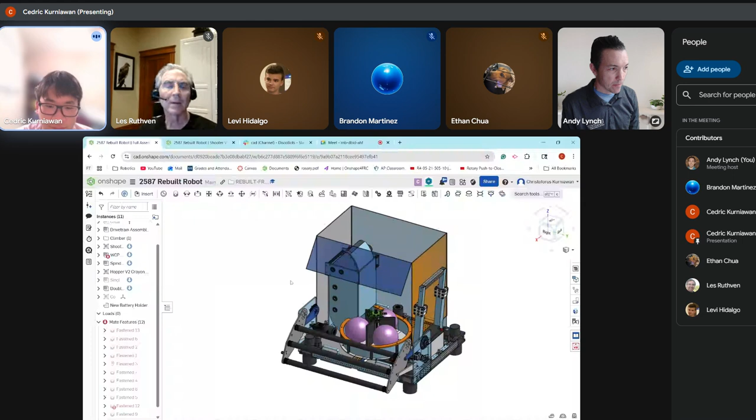All right, so we made pretty decent progress. CAD-wise, there's still just a billion details that need to get put in, and we're slowly working towards that. We did a lot of really good testing on Saturday, especially with the Spindexer.

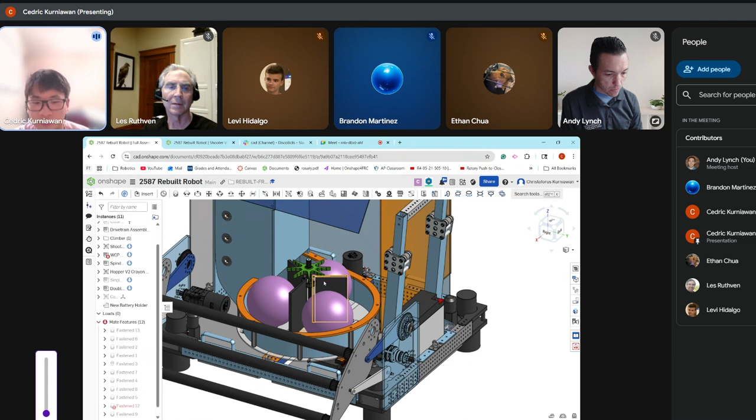We actually found that with the way we have it set up here with a short wall, the brushes are quite problematic. So we tried kind of a stacking, like a cake, using 4-inch wheels, then a 3-inch wheel, and a green compliance star on top. We found that worked incredibly well. It was really violent, which is exactly what we want.

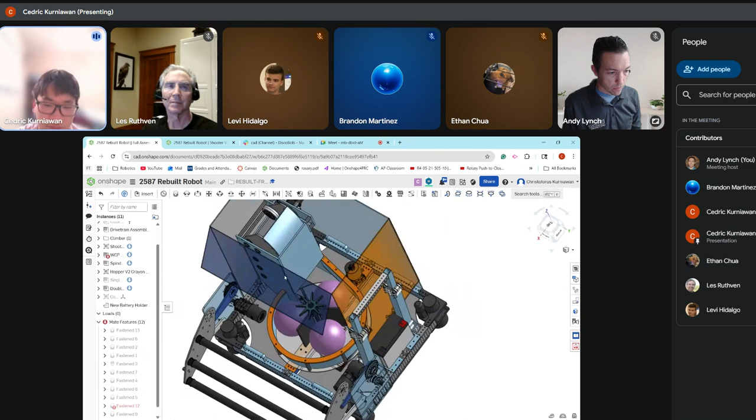So I'll hopefully make that change in CAD soon, adding in the wheels, because I think we're pretty happy with how that went. The Spindexer isn't final, but it's probably the most developed thing we have on our robot right now. So yeah, we're pretty happy with that.

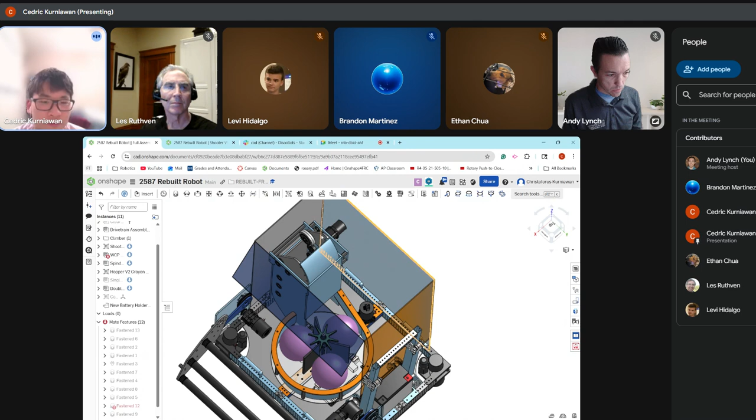We also tested the shooter. The shooter was a bit tougher to generally test just because there's a lot more that goes into it. It's not a subsystem that can really easily be tested. But we put it onto a CIM motor, and we found that we didn't shoot very well. I think we shot maybe 6 feet or so, kind of just across the room a little bit. So the shooter's going to get a bit of a rework.

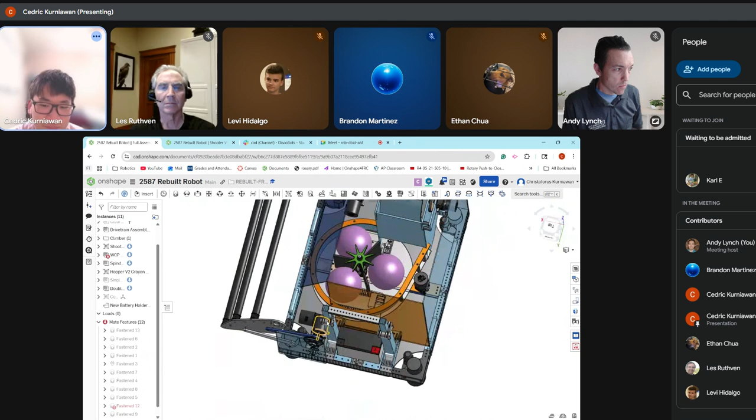I think the big thing I really need to work on, which is lacking a bunch of detail right now, is the hopper. I realize it's not actually as straightforward as I initially thought, just because especially on the side where we have the intake and over the climb, there's not that much space. It's hard to find the balance between creating good support for each of the hopper panels while still maximizing our fuel storage. So I'm still slowly working towards a more detailed funnel.

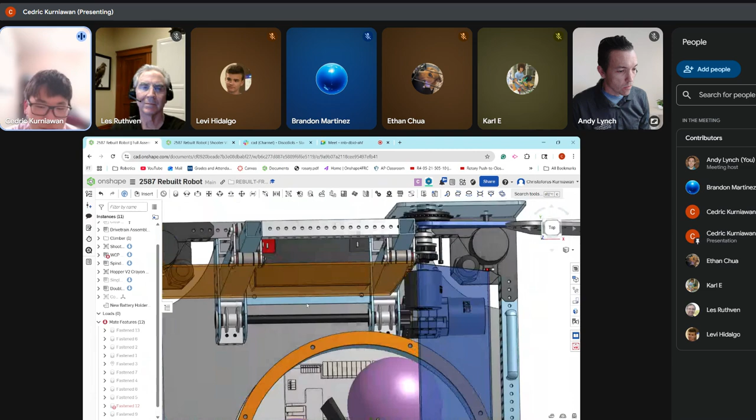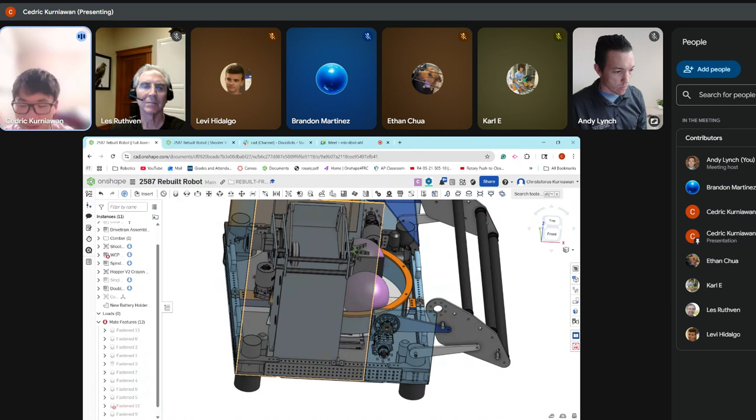We cut out temporary panels from black ABS sheets, just to have something to represent a hopper, so we can hopefully eventually get to a point where we have an intake, a spindexer, and a shooter, so even if it's just a couple balls, we can intake some, spindex, and shoot them.

The hopper is just something I think I'll really have to look at closely. We made a temporary corner piece at Lamar the other day. There's a tube plug at the bottom, so you can just bolt it straight into the belly pan, and it'll work as a temporary cover for now. Eventually we want a very well thought out, clean slope, but right now it's a minor detail.

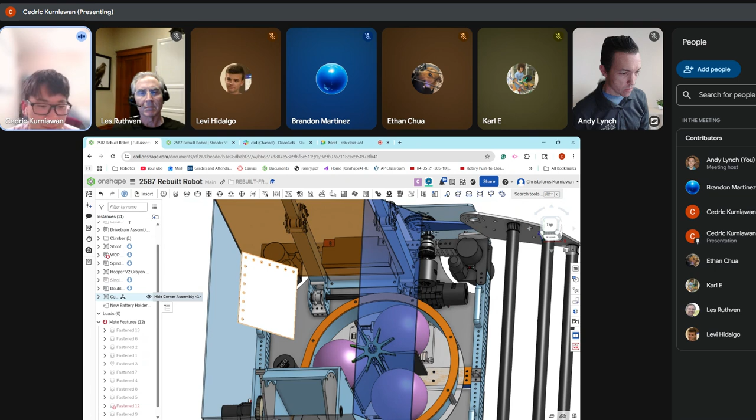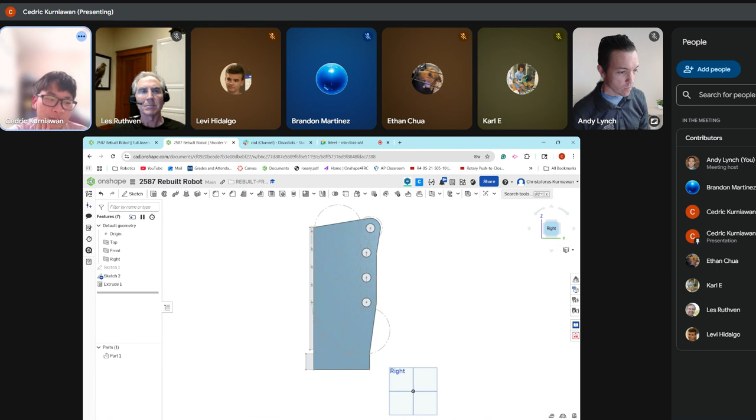The biggest thing I've personally been spending the most time on is the shooter. I realized last night that copying the WCP shooter may not be the best idea because they use different motors, and I only found out a day or two ago that they had 4-inch wheels, not the standard 3-inch Colsons I thought. That's a big deal because the bigger wheel lets them get more surface speed, and it worked well with their compression.

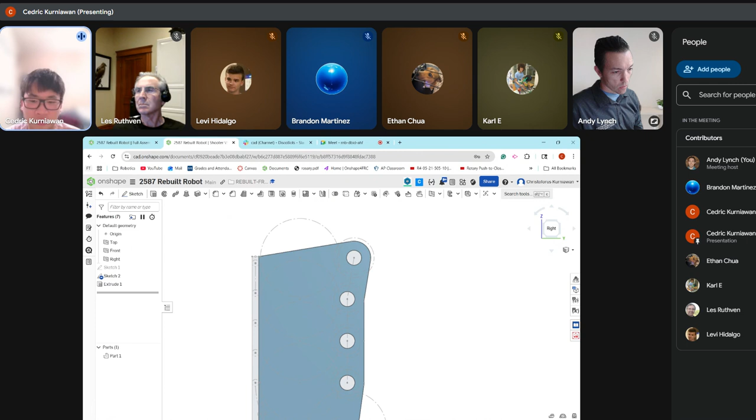But we don't really have 4-inch wheels, we have a lot of 3-inch wheels that I think we can make good use of. So I saw Rev posted a YouTube short showing them shooting a stream of fuel and getting every single one into the hub easily and consistently. I think they use a vortex and some 3-inch wheels.

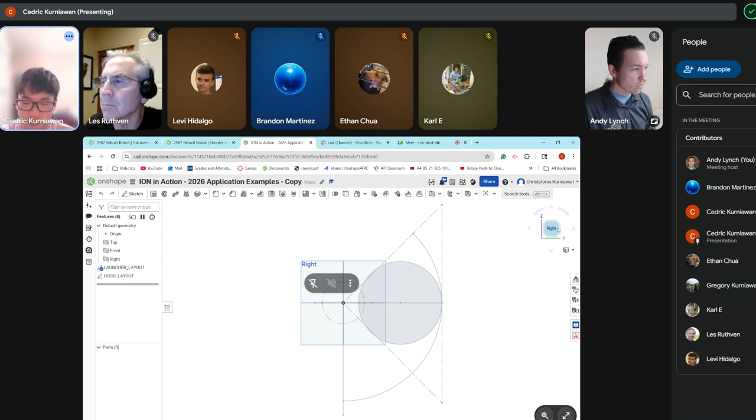I'm going to look closer at that idea because I think it's much more in line with the resources we have and the stuff we're going to pull. They have much less compression compared to WCP, so I think it's going to work a lot better.

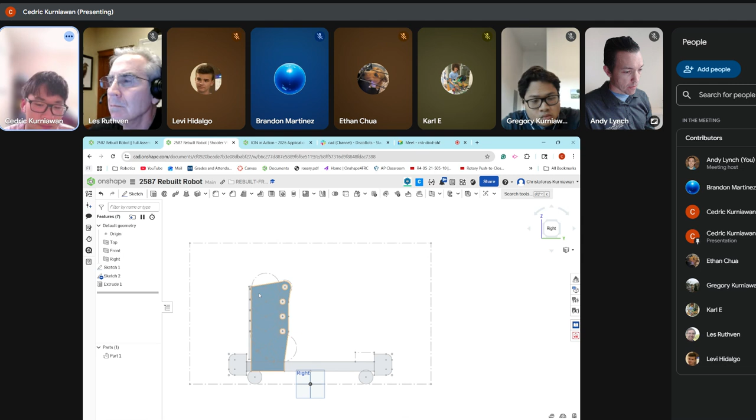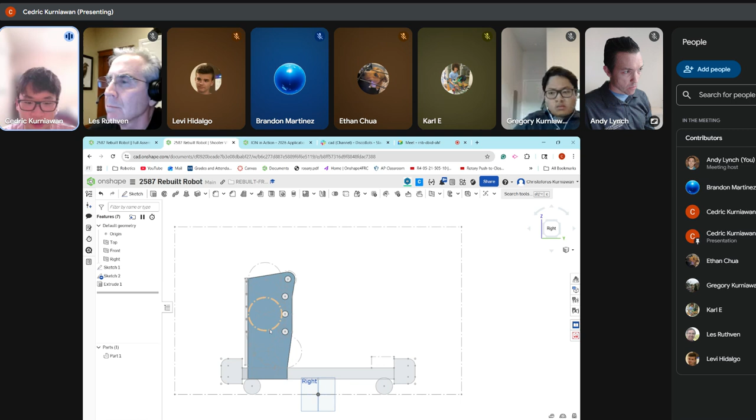This is my current iteration right now. We discussed finding that balance between a tall versus a shorter shooter, and we haven't really reached a final decision. But a big thing we pointed out is if we wanted to shoot over a climber, which we plan to do, we have to shoot over our whole hopper. So our shooter naturally has to be relatively tall, since it has to shoot over our whole robot's height of about 30 inches.

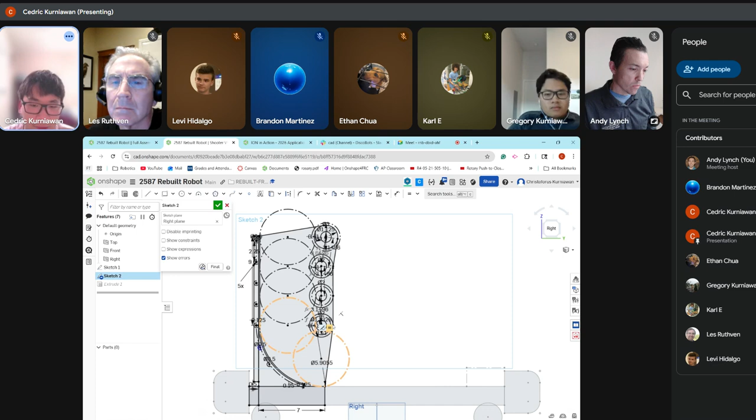What I have right now is I laid out the sketch and tried to make sense of everything. We have a ball here, and the idea is we make this sort of like what we did with our spindexer, where we have polycarb zip tied to churros. I was thinking as the backing of the ball path we can do something similar, since I've seen other teams do it too, using that backing to create the slope and a really smooth ball path for the balls to travel on. I tried my best to make sure there weren't any dead spots.

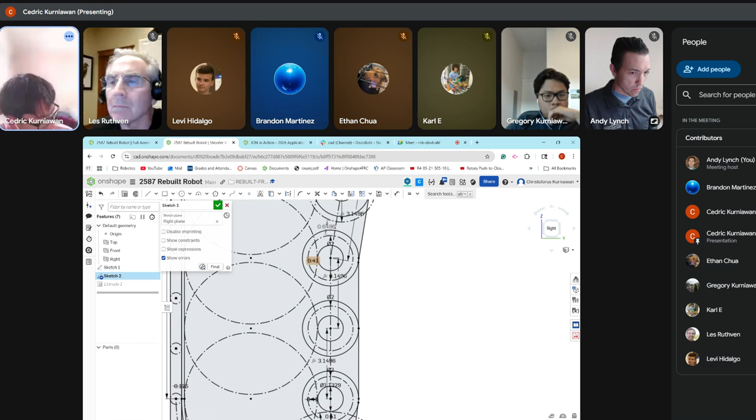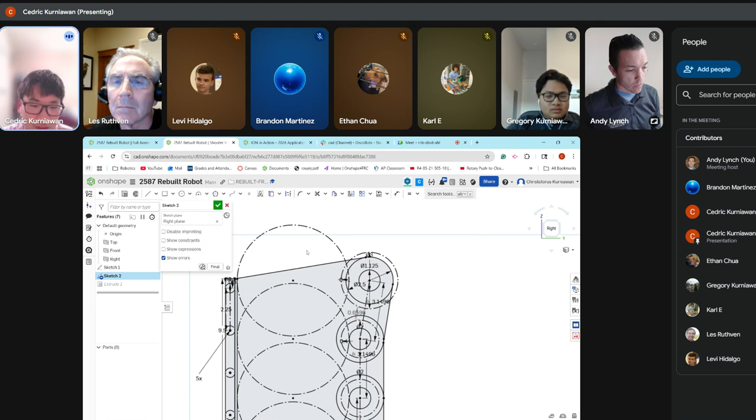For these compression numbers specifically, I tried to focus more on Rev stuff. Depending on how we want to do it, I think on the indexer itself a lower compression may work better, just so we can move the ball faster. The shooter compression I'm going to try to keep as close to Rev as possible—that's non-negotiable in my opinion, because they proved their shooter works really well. I think they use the 3-inch Rev grip wheels, so we have plenty of those from Crescendo, and we have a bunch of 3-inch Colsons with pretty similar properties.

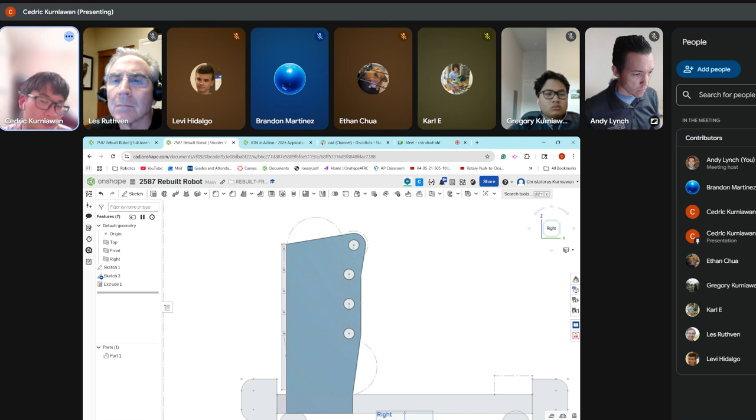Yeah, this is what I've been working on. I think the biggest challenge is going to be getting a hood working. My plan with the hood is to have it rest on the top of the shooter plate itself, and then I'll need to pick between an actuation point that comes from pulling it from this bearing hole, acting as a dead axle.

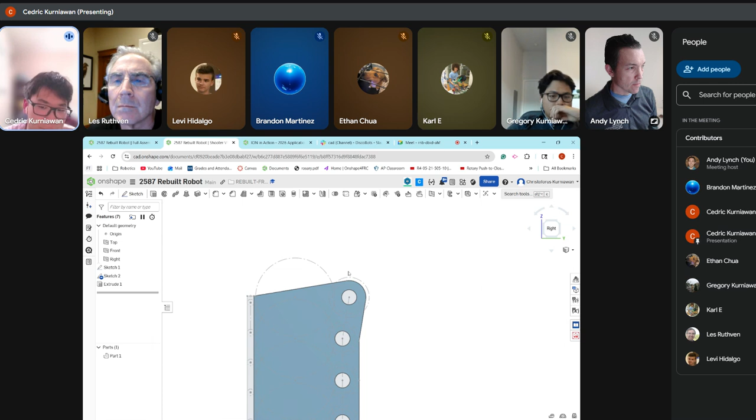Another common hood design I've seen is what Levi was trying to do—a 3D printed hood with gear teeth on the back and a rack and pinion system to actuate it. I think both are fine, it's just a matter of packaging and generally what we want to do. That'll come together eventually, hopefully.

We made a couple of small minor tweaks to the drivetrain, like adding these radiuses here in the corner, just because Karl pointed out that having a sharp corner, even though it's filleted, can be a stress point. So we decided this would be a better option.

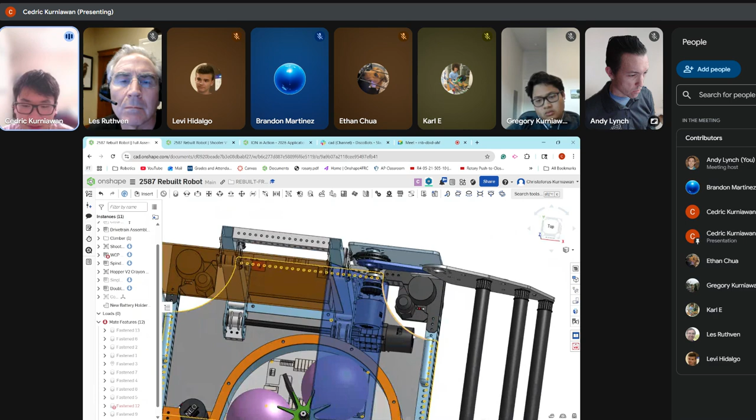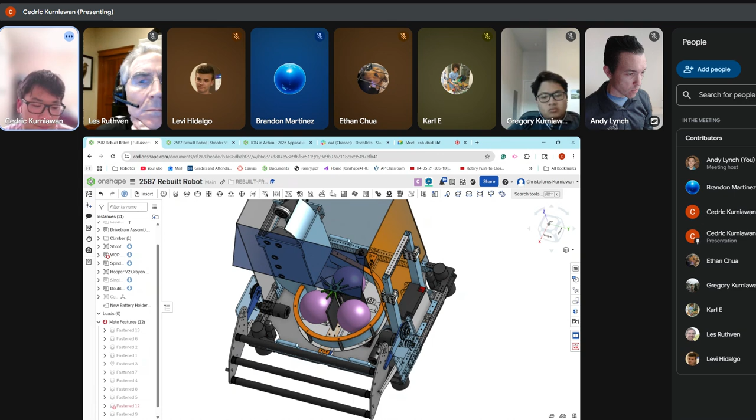The belly pan is probably going to be 1/4 inch polycarb, just because we thought having a heavy belly pan this year... having a belly pan would just slow you down without providing as much advantage as having a lower CG. We also decided that having a clear belly pan is going to be really important for inspection and reaching electronics. A clear belly pan is just going to make that process go a lot faster.

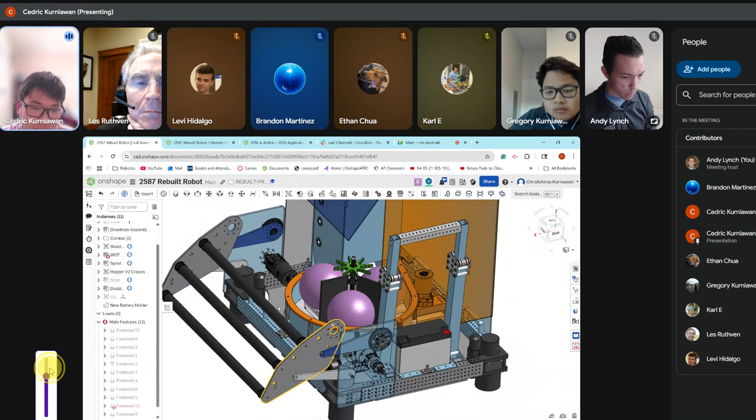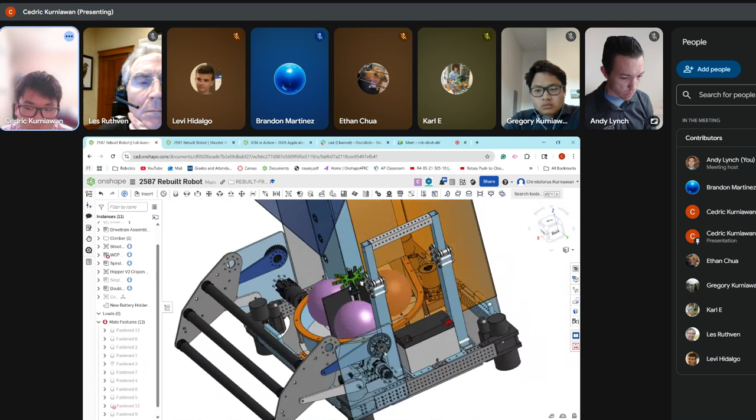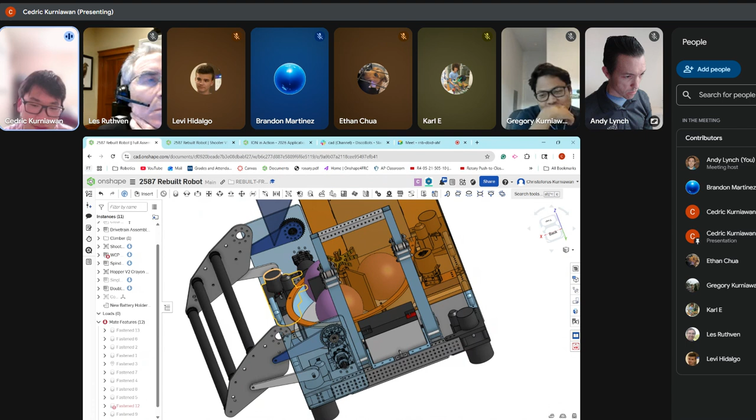The intake, I've yet to really make the changes that we discussed with the actuation. What I really want to do is a MAXSpline axle that goes all the way through, because of the billet sprocket. It already has a MAXSpline bore in it, and I think MAXSpline is a pretty good application here. It'd be a dead axle, like we did on Tombstone. That robot didn't see much actual actuation, but the dead axle itself was really smooth, and we were pretty happy with that. So I'm gonna stick to that, or attempt to, for this design.

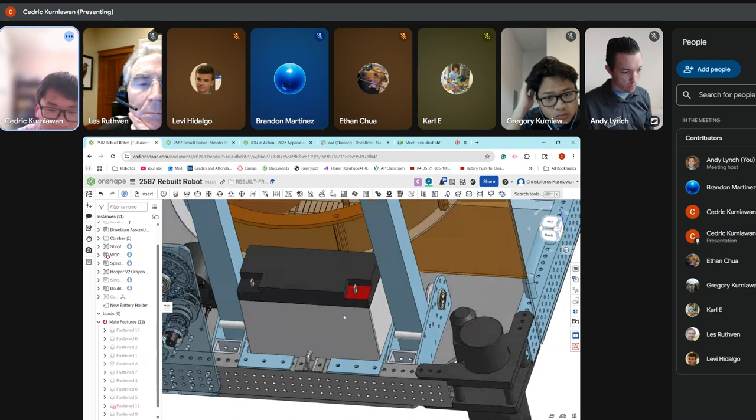With the climber, I know we had ideas between a single climber and stuff, but I think if we want to play it safe, the double climber is the way to go.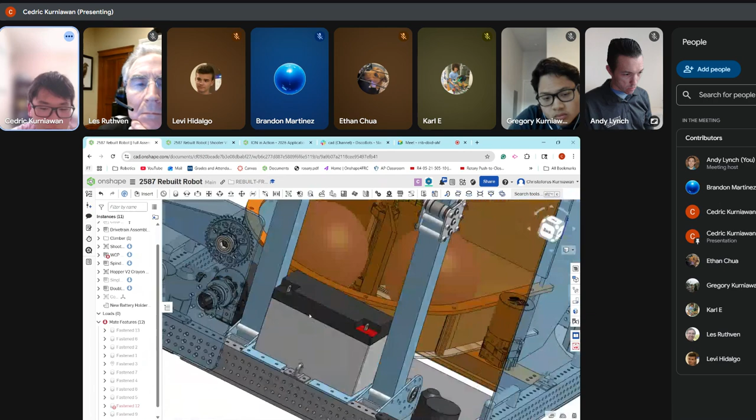Devanch has been working on this battery solution. We see obvious issues like this really thin part, so that's something we're working towards. We're gonna keep it similar to how we did it in Crescendo, just because I think it's the simplest way to do it. That's about all the CAD updates I have so far.

Still lots of details to put in. I will say that a 1/4 inch belly pan seems a little thick to me, but that's just my intuition working here. For now, I think what we have is testable.

To me, I think we really need to focus on the most testable things to be ready by March 1st. So if someone says, 'Oh, we need to cut a new belly pan,' I'll say lower priority. Let's make sure the intake's working, let's make sure we can get the Spindexer on the robot, and we can cut some shooter plates. We got to get all the intake to Spindexer to shooter working, and see where our major problems are, so we can get those systems all working together.

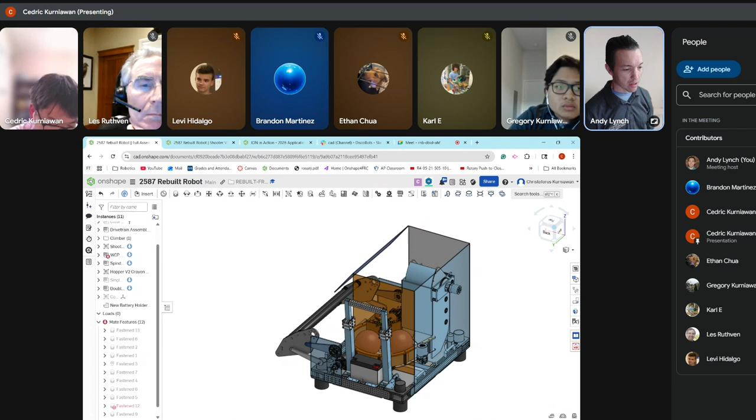In worst case, if we have parts that we replace, I think they can go to Westside, and maybe Westside could cut some new rails and start making a clone of this drivetrain dimension.

I like the double lift. So Les and I put together the climber in the box. We have one of them built, and it's pretty neat.

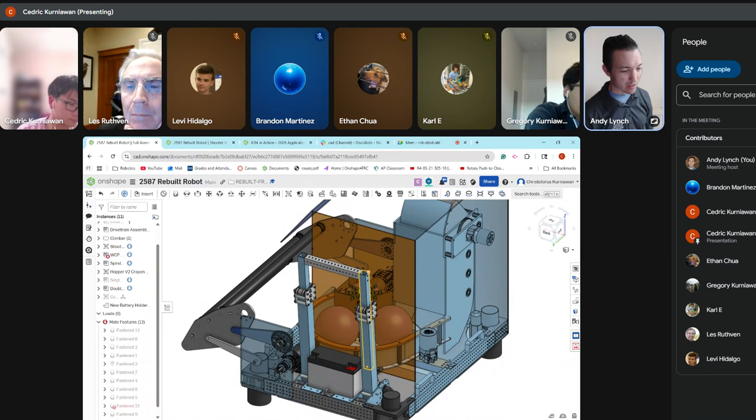There's some tricks to it, it's a spring-loaded mechanism, so you really have to have the whole winch tied in to your motor, or else it just shoots right up out of the spring. By doing a double, we're using twice the spring, which will technically make it go faster, I guess. I don't know how much that will matter. There's a little bit of pulling stuff happening, but I think we can tie them together through one shaft and run one motor, and it should probably work.

Greg also had a good point: the way we have this set up, we have to treat it kind of how we treated our elevator last year, especially with the rope—making sure that if we want them both perfectly level, the rope needs to be equally tensioned and wrapped. The wrapping has to be mirrored across both sides, same principle as last year. If we have the mirrored sides, they'll have consistent feeding and pulling of rope to make sure both sides are always level. So something to think about.

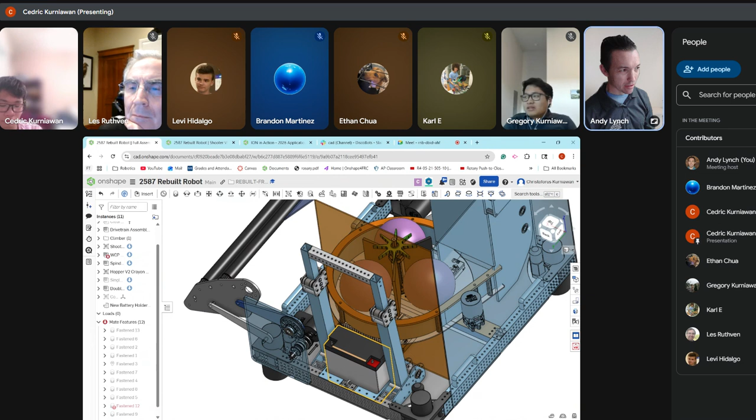There are reliability issues, so we might decide to package a motor for each one, and then if one of them's running that's enough. The problem is I don't know what happens if you have an issue with one and they're tied together, because we've seen teams with independent climbing mechanisms where sometimes only one hook catches and it still kind of works. But yeah, there's a lot of question marks.

I think we just got to start building and come up with something we can test out on March 1st. That's my goal. So I'd like to change the CAD to add hooks, if that makes sense. If we wanted to hang on the bar with this, is there a way we can put hooks on top to hang on the bar instead of doing a side climb?

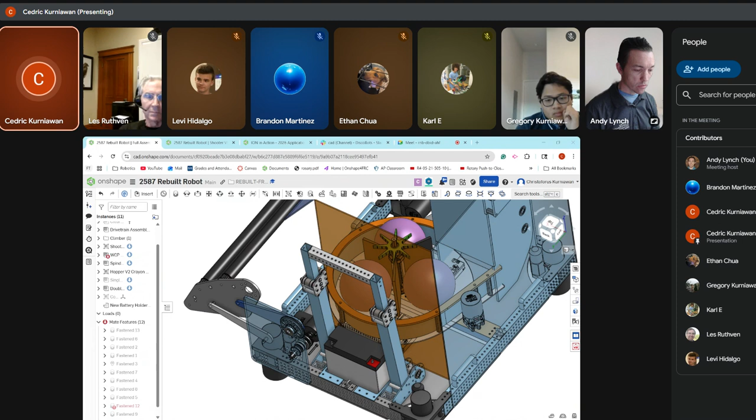There's probably definitely ways to do it, I just haven't looked into doing that sort of center climb much. Just judging off our drivetrain dimensions, doing a center climb may be a bit tough. You may be able to use one upright, a straddle type with the upright in the middle. The problem with center climb is the other side will just hang down, so you'd have to get up about 8 inches because it's not at all over the CG. But if you have an upright and you're going up against it, it'll resist your force so it won't rotate down.

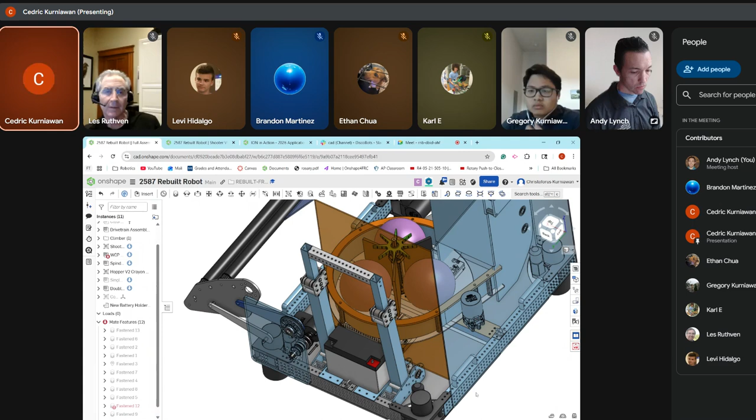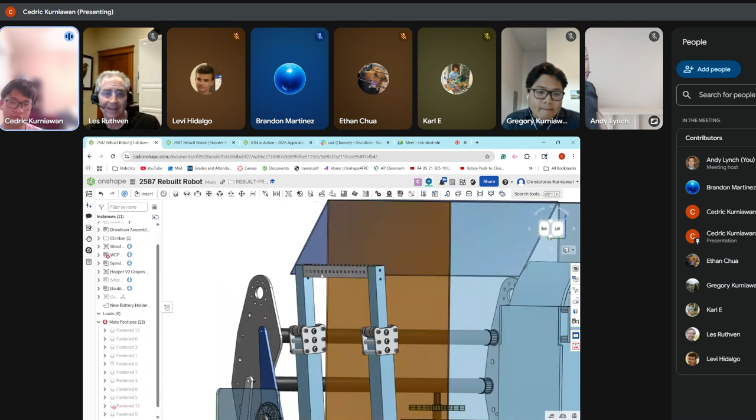Or you can have a hook. Karl also mentioned the nice thing about this sort of design is we don't know our CG yet, but it probably won't be dead center. So we can design whatever plate connects these two plates to adjust the point at which we hang, to make sure our robot's balanced as we climb. I thought that was pretty neat.

The other thing you could do is if you have a cutout in your bumper, the bumper literally holds you in place so you can't rotate side to side. That's pretty easy - you can be off by 8 inches and still not rip your bumper off.

That's an interesting bumper cutout idea. That might be something we want to throw up in CAD to get an idea of how we'd do that. Or we might just say side climb is the only climb we're going to do, and that's fine. I think we've got to just look at it - March 1st, what do we want this robot to do? Keep it simple, get our basic priorities done, and then think about upgrades later.

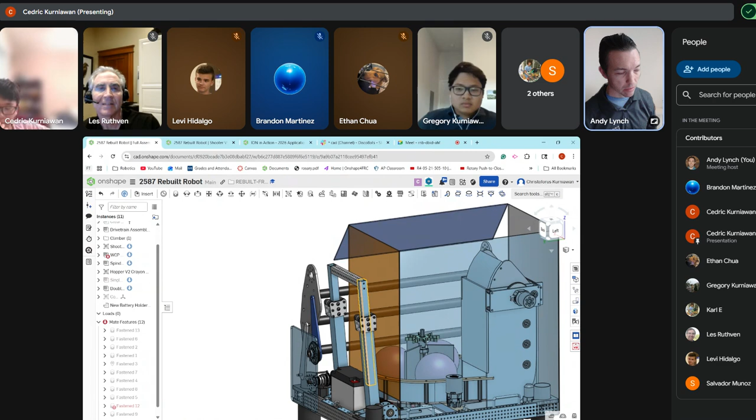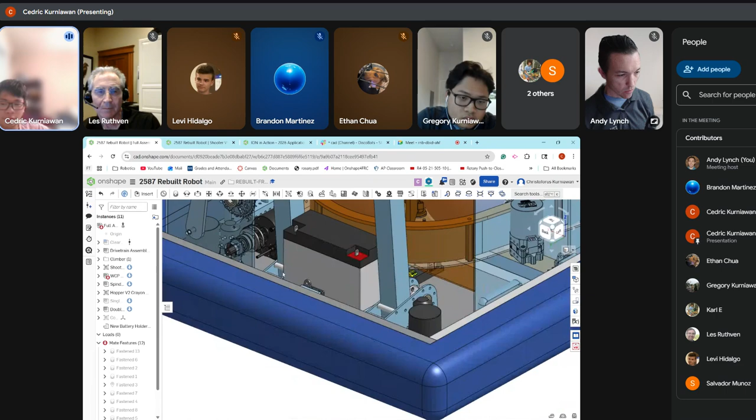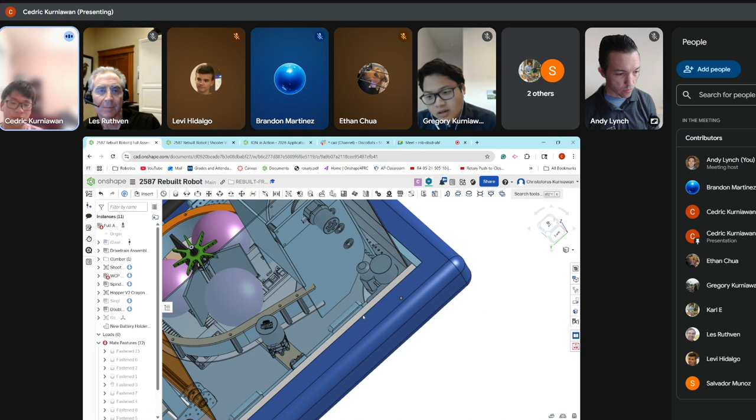We could also start thinking about bumpers. We have bumper wood dimensions - Enoch posted the wood pieces we'd need. In terms of style, it's basically a copy of last year's design since we were happy with it. I think we added a bit more tolerance or gap this year because we'll have a lot of plates bolted to our drivetrain, so we need more clearance. If we want to get the wood together and get pool noodles on it so we're ready for March 1st inspection, that might be a good idea too.

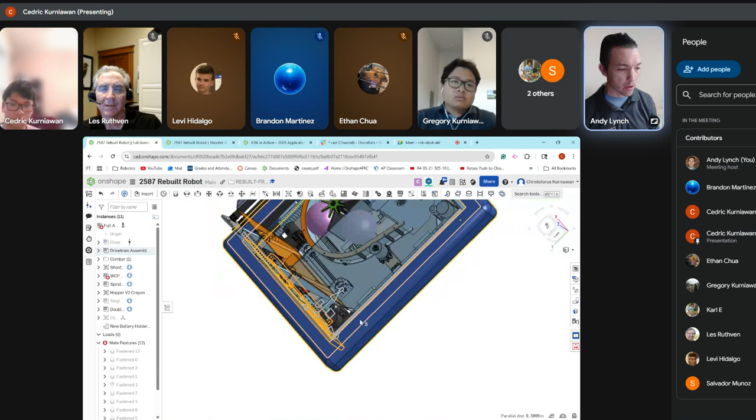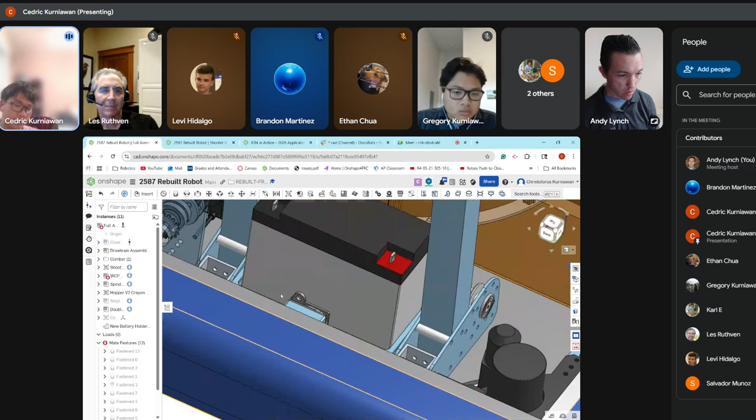So if we have a cutout, our bumper latching is going to be a little different, right? Yeah, because the style we did last year works best with a one-piece, full all-around bumper, due to how it latches on. If we have a bumper cutout here, that may change things and make it a bit more complicated on this side, but it's definitely an option if we decide to do a bumper cutout.

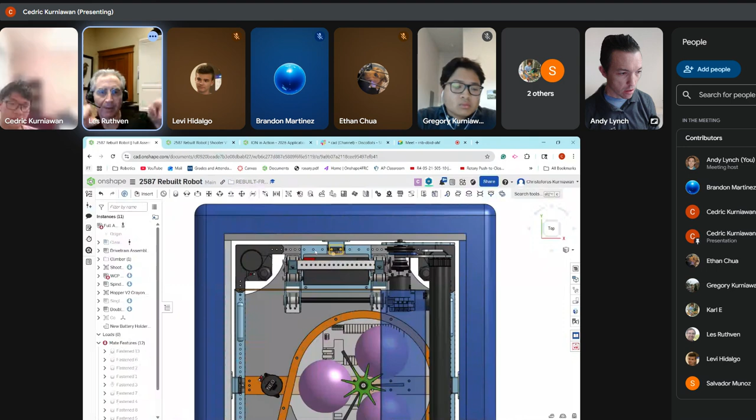So it would be a split bumper? Kind of, yeah, or two latches instead of one in the middle - two at both ends. But you're thinking keep a single bumper, with just a 5-inch cutout or whatever, and then anchor it at both sides so it can't rip the bumper off when climbing.

Sounds reasonable. We'd be able to run a hard piece all the way through and just leave off the foam on one part, maybe. I'm not sure if that's legal though. Does that make sense? You have to think about it - it has to be open, but it's okay.